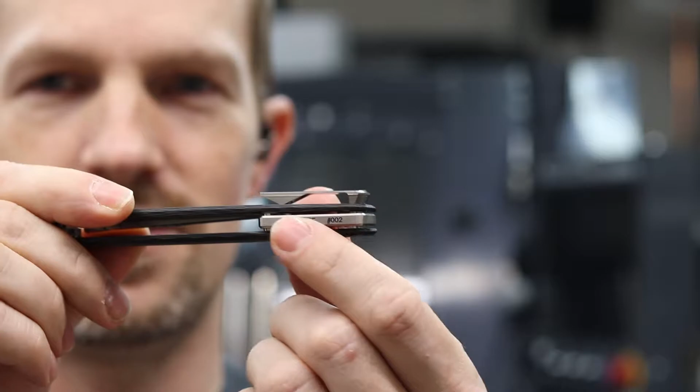Hello everyone. This video will be part one of the interface knife build. I'm going to show you all about the backspacer, how everything's machined, and I'm going to go through what it takes to make just this one part.

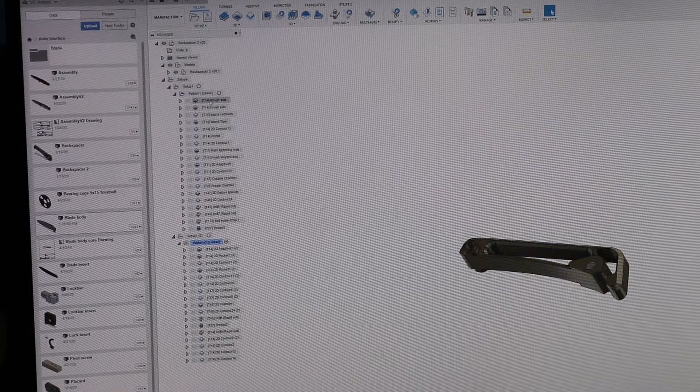This is the part of the knife that goes in the very back that spaces the two halves apart from each other. Just goes right back here. See that piece? Got all my tool paths reprogrammed for the new machine. The piece of stock that I'm using, I should be able to get 4 pieces out of, and just in 2 operations.

It looks like on the simulation that everything will work. Went through this a couple times. Made sure it doesn't look like there's going to be any problems. So nothing left to do now but to go out to the shop and try it out.

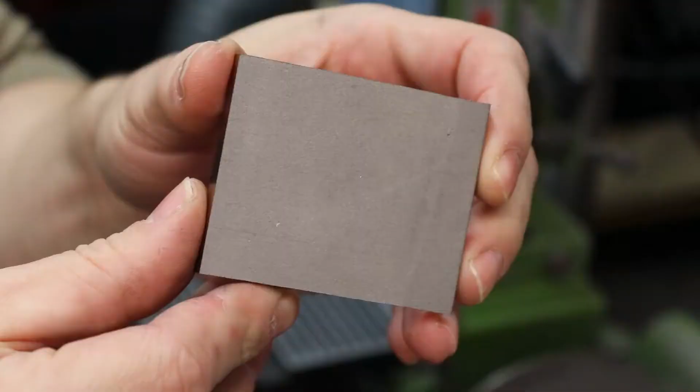Alright, so here I've got my piece of stock that I just bandsaw cut out of another sheet of titanium. This stuff is really hard to cut with a bandsaw. I really should be ordering this to size so I don't have to do this whole process.

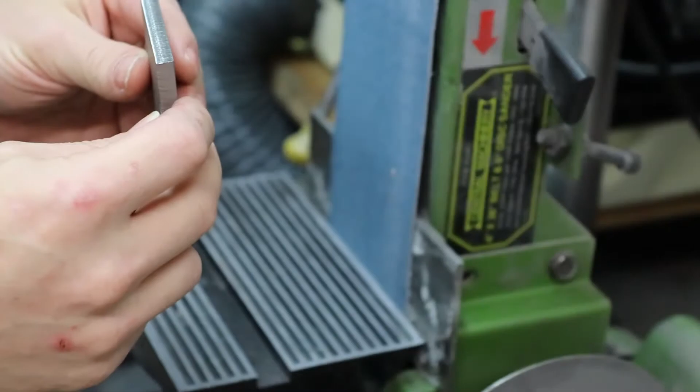But preparing the stock is an often overlooked but somewhat critical part of setting up for this type of machining. You want it to be as square and as flat as possible. There we go. This could get a little loud.

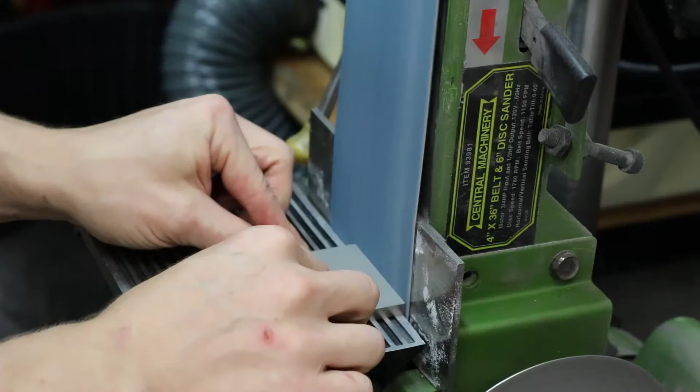Alright, so I got all the edges cleaned up, nice and smooth, no burrs on it. It's ready to go into the machine.

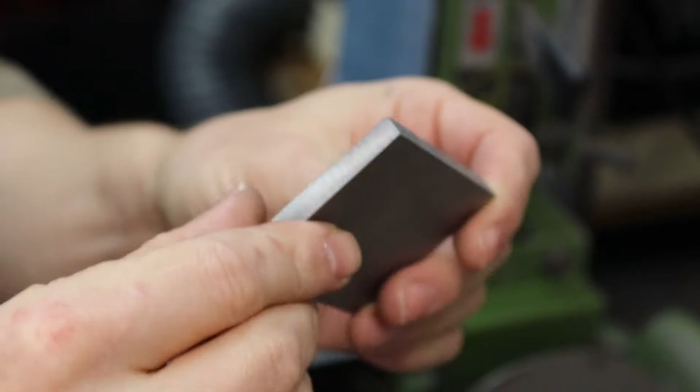One of the things I like to do before I put this in the machine is to put some chamfers on each of the corners so that I have a reference surface, so that when I flip it over I know that that surface will go towards the back jaw of the vise, so I don't get it mixed up. So like that.

There we go. Before I let the machine do anything, I gotta run a warm-up cycle to get the machine up to speed and up to temperature before we do any machining. So the one that I'm using is from Saunders Machine Works website, and they just made some modifications for it to work on this machine with the RPMs that it has.

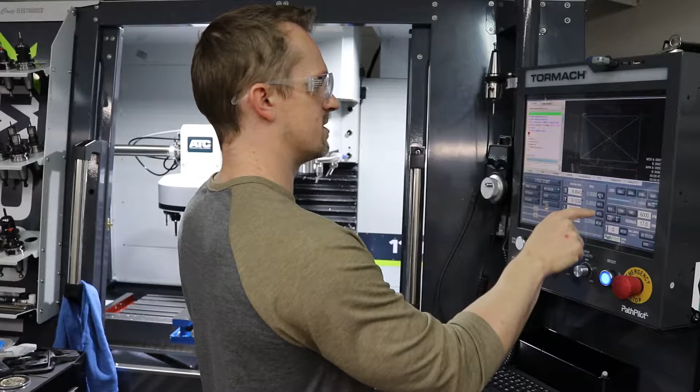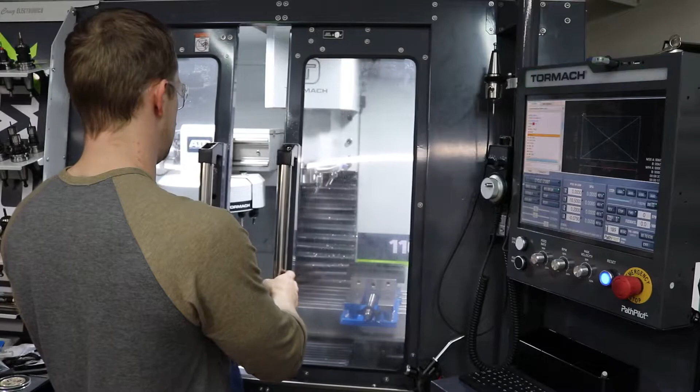Gotta reference all the axes first. Alright, so it'll run that for a few minutes, get it warmed up, then we can start.

First thing I'm going to do is actually take these vise jaws out. They're a little too tall for the parallels that I have. I'm going to be doing most things in the vise for now, because I know that works. I'll work on doing things in other ways with some pallets later on. But for now, everything will be pretty much in the vise. Gotta switch out the jaws to the shorter ones.

This speed vise handle works pretty well. It'd be nice if these were a little easier to take out. You gotta use an Allen key every time.

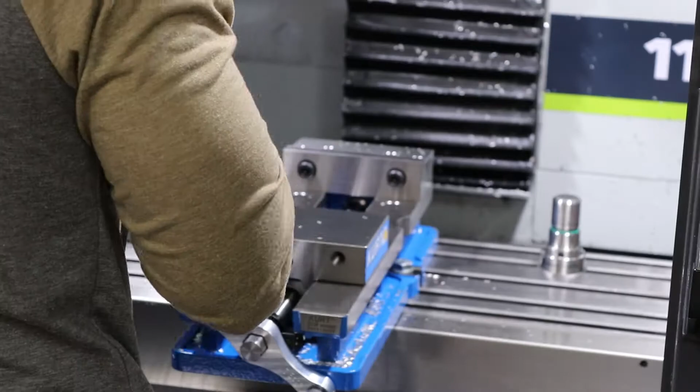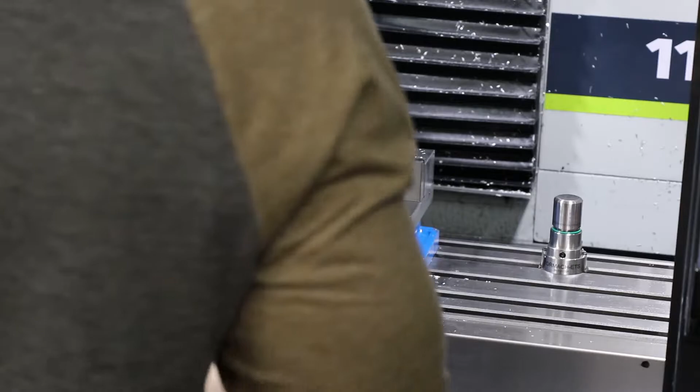Alright, so those are back in. Just gonna put some parallels in. See what size. Material. I want this to stick up just a little bit. There we go, parallels aren't moving.

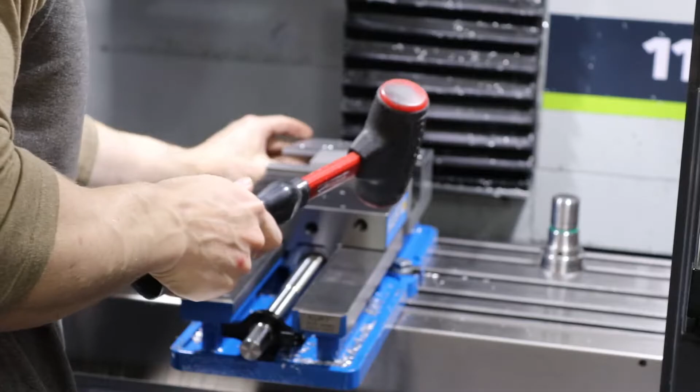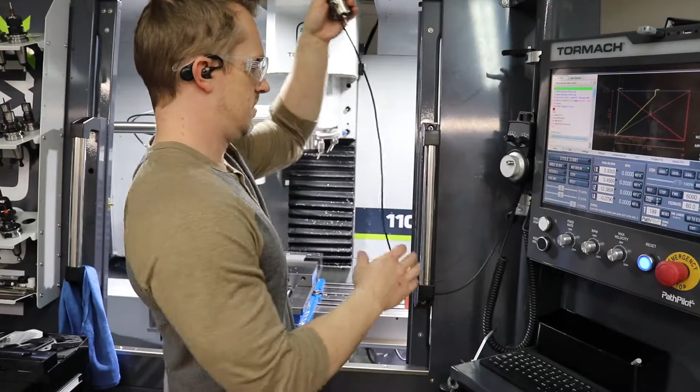So we'll start with the probing. Set to 0 for the part. I've got my probe set as tool 99.

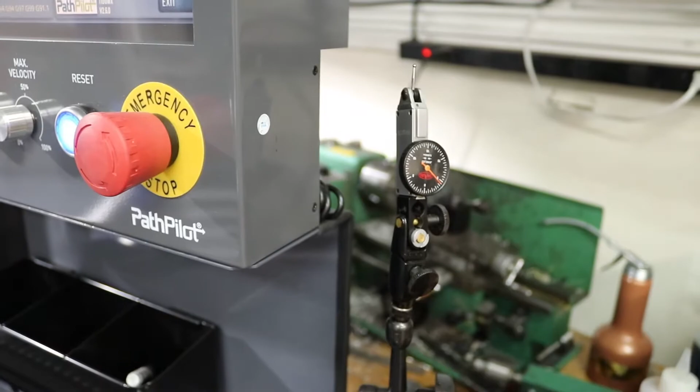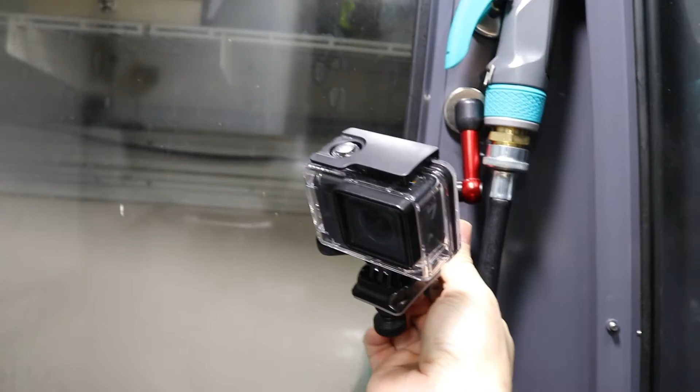I think we'll switch to the inside camera so you can get a better idea of what's actually going on in here. Got this camera set up on a little articulating mount. It's similar to a thing that you would use for measuring, one of these guys that have an indicator, but using this cheap one just to hold the camera. We'll see if it stays in place, if we get anything usable out of it. I'm a little worried the magnet might not be strong enough, but see what happens.

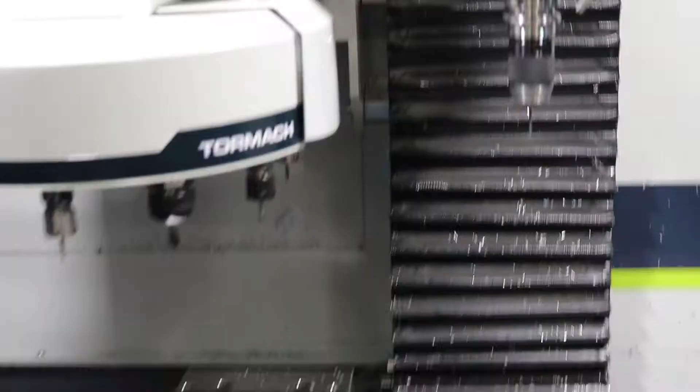So this part takes 6 tools. I got all of them loaded. Got a couple of straight ones that are pretty small, 1/8, 1/16. Got a larger chamfer mill, a smaller chamfer mill, and the threading tool, as well as our carbide drill. Here we go.

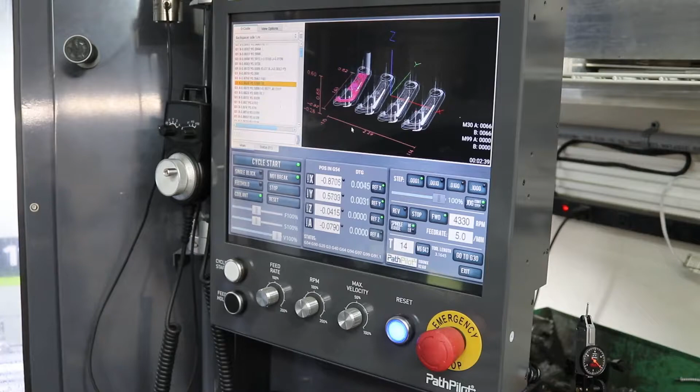This is going to go for about an hour and a half, so we'll come back when it's all done and flip it over.

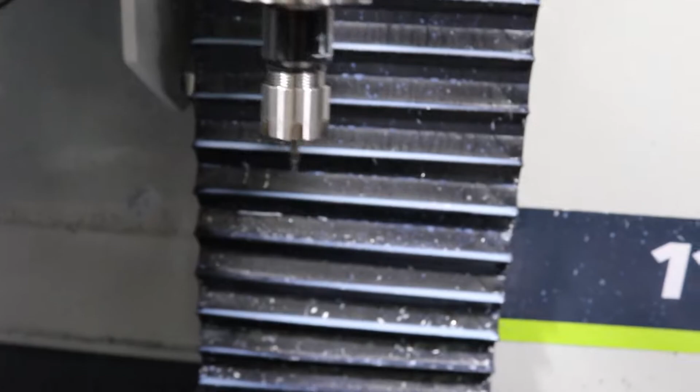Alright, so we broke a tool already, the 1/16 inch, right after it plunged into the first pocket. I'll have to change that out and make an adjustment to the CAM. See if I can get that to work without breaking anything.

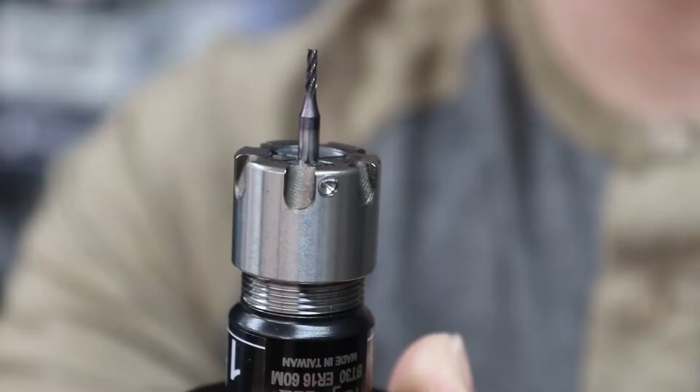Got the new tool in there. See if it'll last.

This part of the video has no sound because my camera guy forgot to turn on the microphone. He's fired, obviously.

So I'm just testing the threads to make sure that that worked out okay. Everything's fine. There's no more broken tools. Everything worked good.

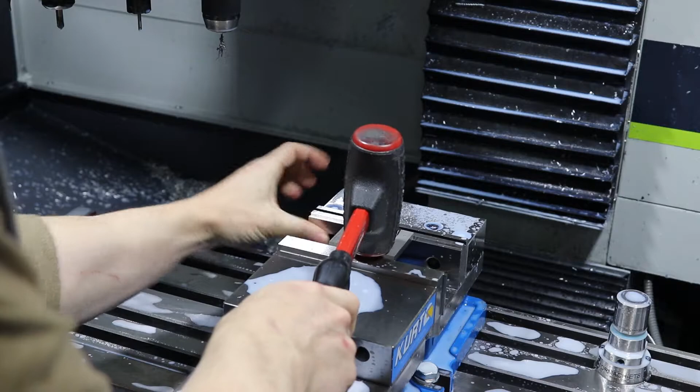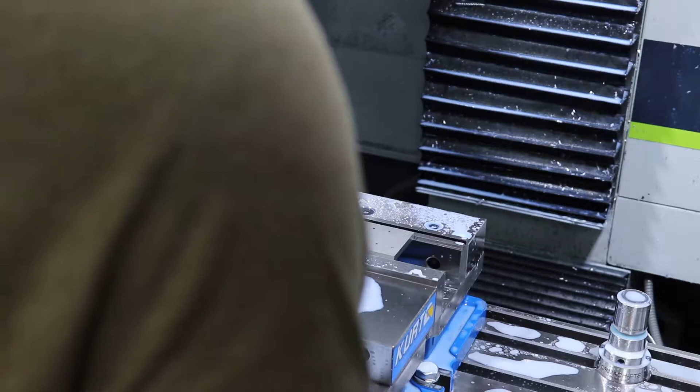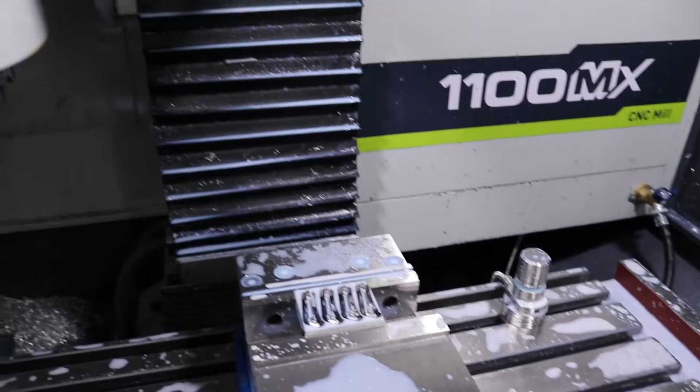Alright, this side's done. Let's take a look. Looks like all the tools survived. Not bad. Alright. So far these look really good. Got the tabs left in there.

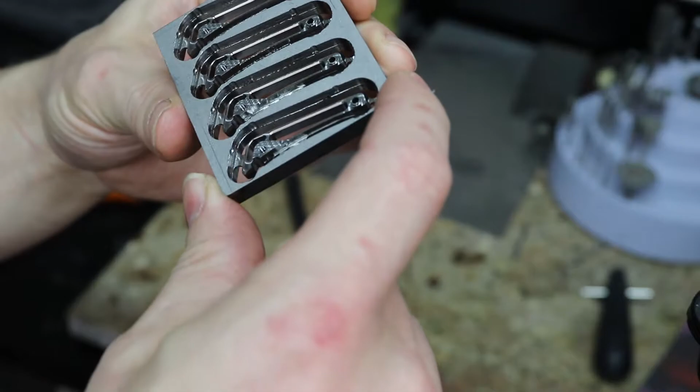There's a fine line when it comes to tabs as to how much to leave. Don't want to leave too much where it's hard to get out, but you want to make sure you leave enough where it doesn't come out of the vise. Just got to cut these off, and then I can start the finishing. Just going to use this small cut-off wheel to cut off one side of the tabs. The other one will break off.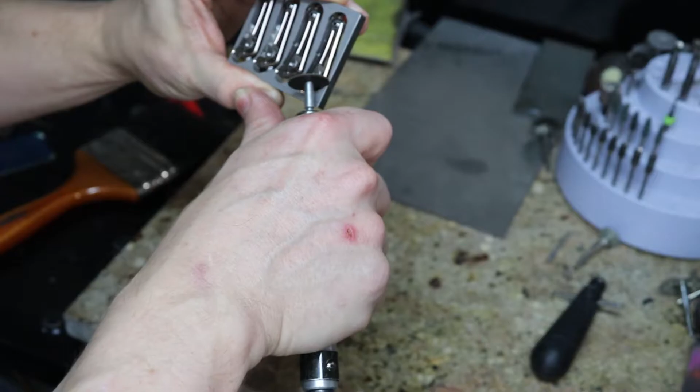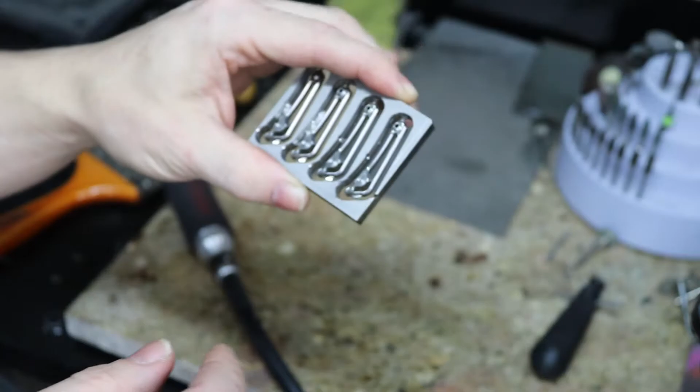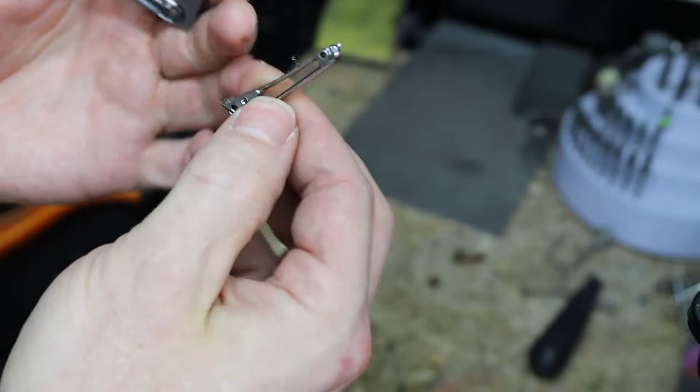Okay, just got that tab broken off. It's hot, but you can just push it out. The other tab's broken off. We'll get those later. So after the machining, there's a little bit of a burr in the middle left over. The outside's pretty smooth, but I'll still sand that, and we've got what's left of the tab

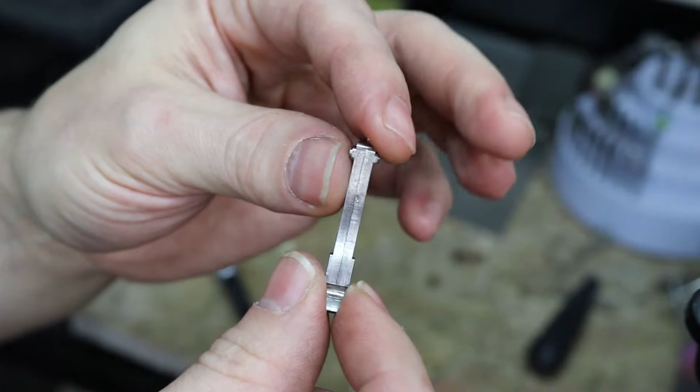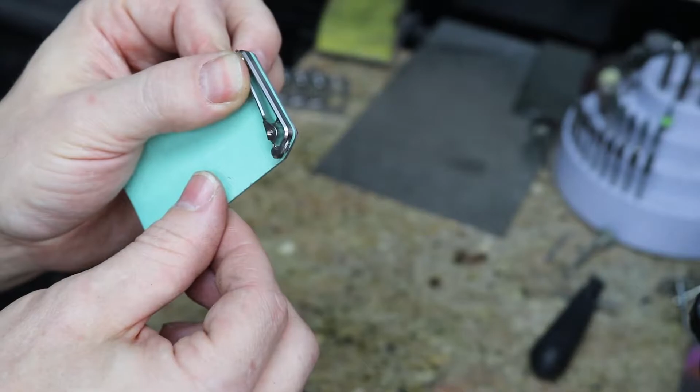on both ends. So I'll put this in my super special fixture, which is basically just a metal plate. There we go. Got one side set up for doing this edge, and one side set up for the other to do the inside. Like that. That way I can hold it straight.

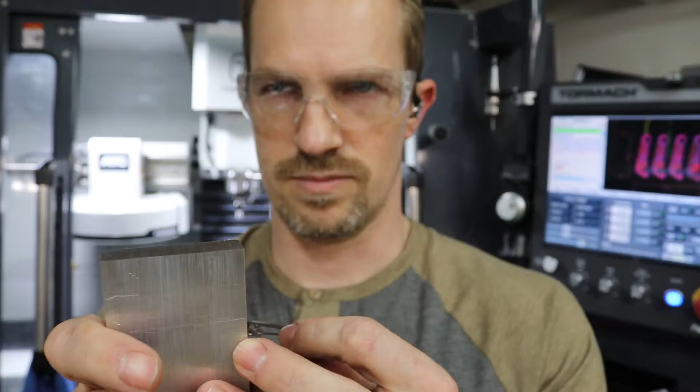Alright, so I need to make a fixture to hold this so that I can do the engraving on the top side. What I'm thinking is just a bar that I can clamp into the vise where it will sit exactly flat and bolt on using the threads that are already there, the backspacer, to hold it upright, and I can do all the engraving on the top. Could even do 2 or more, however many I want. Just depends on how big I make this piece. So let's go do that.

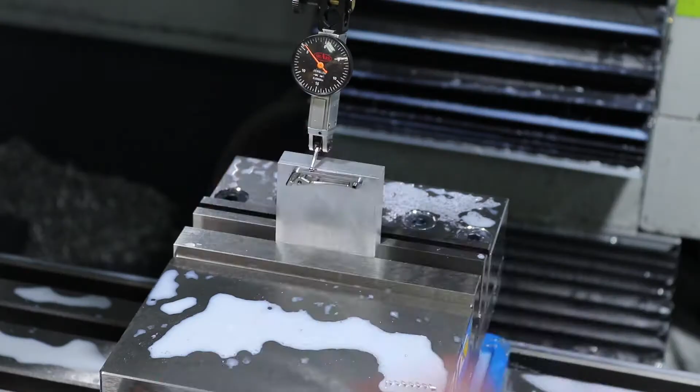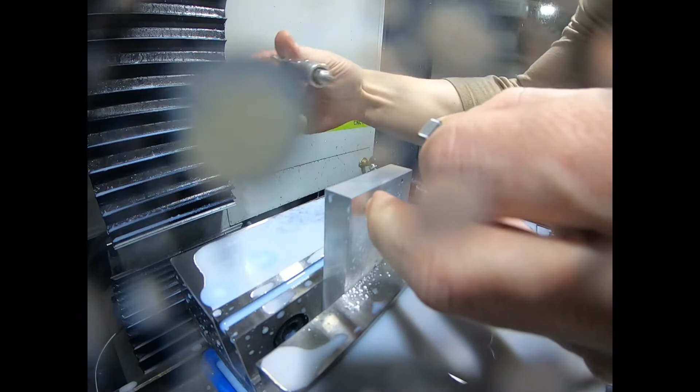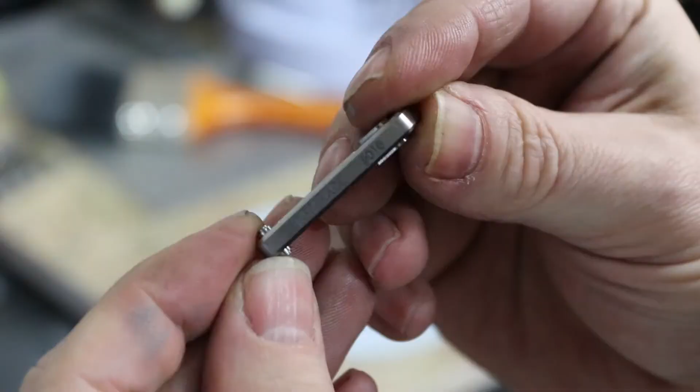Fingers crossed. Here's the engraving. Looks like it might be a little bit deep. It's got a burr on it. I'll take that off. And then we'll go backfill it. There's that. Just gotta clean it off. And we can backfill it.

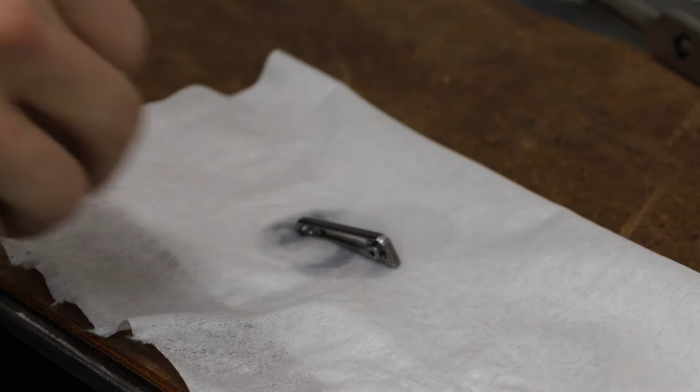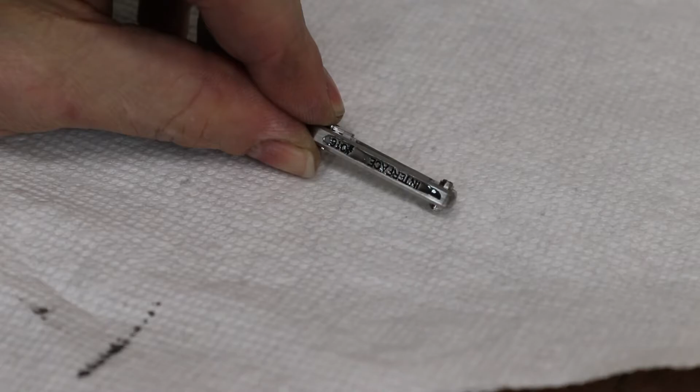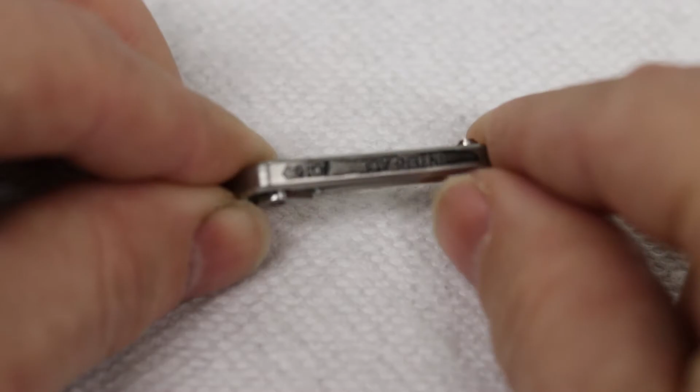This is just some black enamel. Just gotta let that dry, and I'll sand off the excess after. Alright, so we're back after this has dried. There's a couple of ways that you can take off the excess. You can sand it off, or you can use a little bit of acetone to take off the excess. Just got to be careful you don't wipe it out of the engraving. So I think I'm just going to sand this one off because there's not much there.

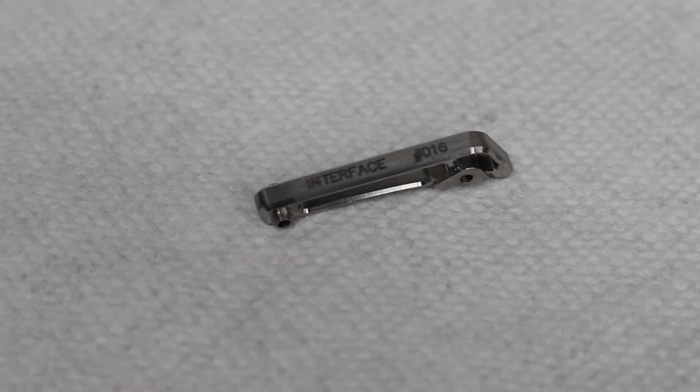Alright, so just sanded it off real quick on that granite surface with the 320 grit. It's still a little dusty, just gotta clean that off. Just a little isopropyl alcohol. And there it is. That looks gorgeous. All the machining turned out really good. I'm sure that has a lot to do with the flood coolant. I didn't have that on the last machine I was working with.

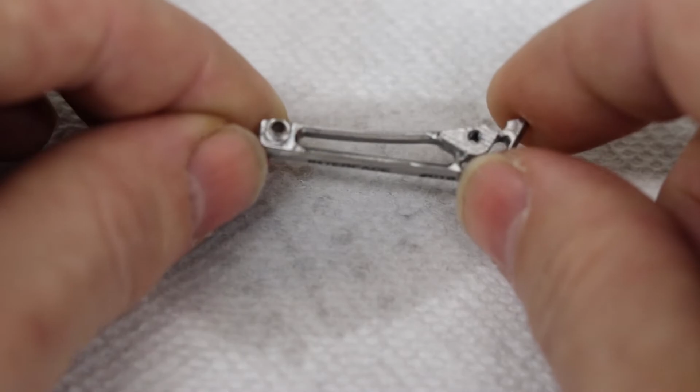What makes this a floating backspacer is the fact that it has these raised sections, and then the rest of the backspacer is not flush to those. So that looks like it's floating inside the handle. This works with just one screw, and what holds this side in is these two little nubs that stick up and lock into the handle scales. You'll see that when I go to the final assembly on this thing.

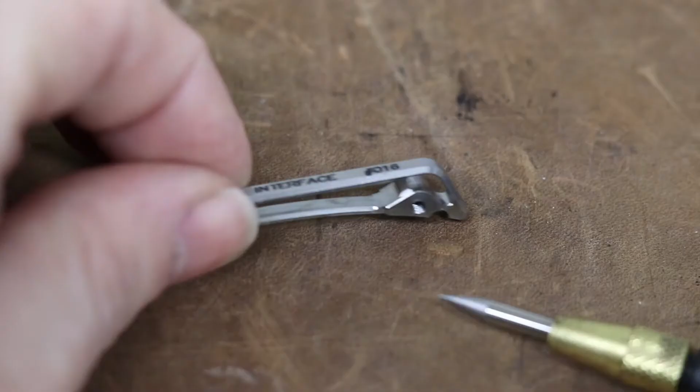Some of the things you don't normally see, this is pretty well hidden when the knife is all together. So all the pocketing, all the cutouts makes this piece pretty light. And it's too bad it's kind of hidden when it's in the knife, but you know, I know it's there. So

the only thing I've noticed that I'm not perfectly happy with is the surface finish in here. It's got a little bit of chatter, I guess, if you can see that. So it's not perfectly smooth like I'd want it to be. So I'll have to see what I can do to fix that. Usually I just come down straight in with the 1/8 inch end mill and try to sort of ream that out, but apparently that's not working exactly how I want it. So I'll have to make some adjustments there and see if I can get that surface to look like a reamed hole. It should be perfectly shiny. So in the meantime, I can just sand it smooth.

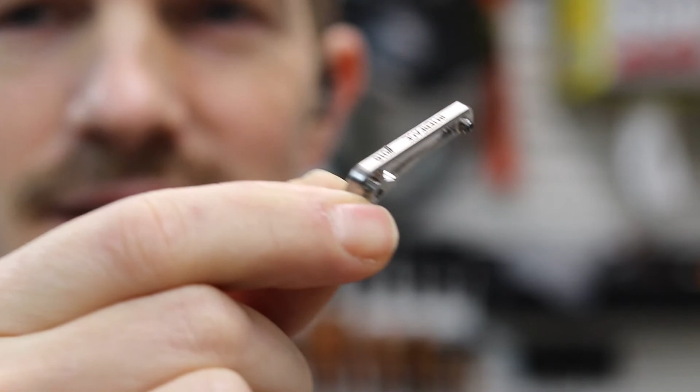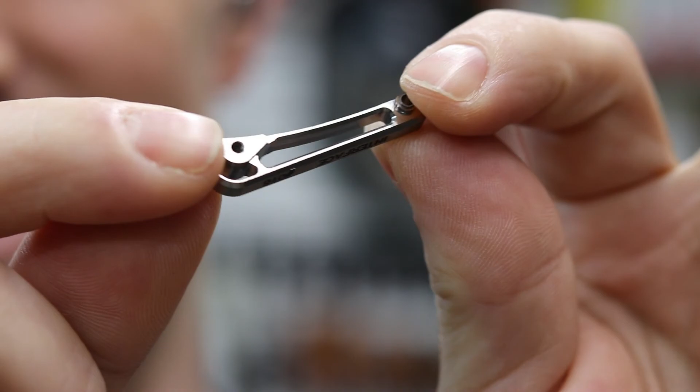So that's it. There is the backspacer. It is finished. Looking beautiful. Engraving looks fantastic. The backfill worked perfectly. All the finishes look really nice. This is probably one of the best ones I've done. So I'm really happy with that. Next up, pocket clip.